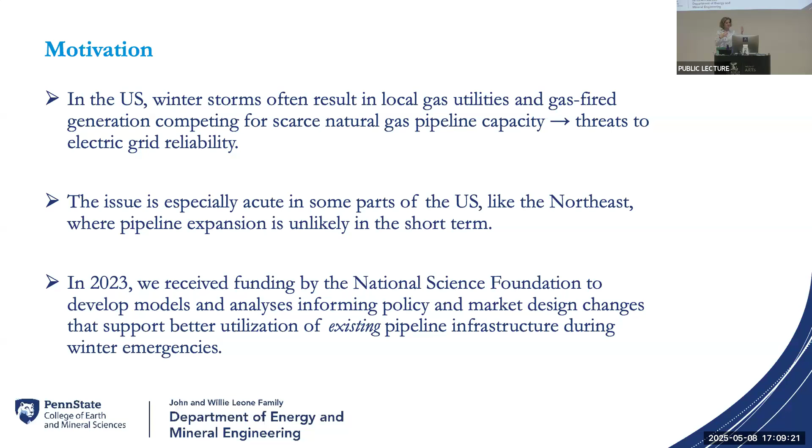And that is pretty much the objective of the project that was funded 2 years ago by the National Science Foundation. I do want to say that we're not taking any policy positions, or we're not making any recommendations on the fact that there's no need to expand capacity. That's a separate story. Sometimes I get questions on that, but that's not part of what we're studying. One of our assumptions, if you want, is that the pipeline capacity cannot be expanded in the near term. So with that motivation, here's going to be the outline of my talk.

I will give you a little bit of background on what's happening on the gas market and what types of contracts the power plants can sign, and again, what frictions there are right now that prevent them to get access to gas. Then I'll talk about a proposed initiative that we modeled to see if this proposed initiative could help enhance grid operations during a cold snap, during one of these emergencies. I'll give you an overview of the models.

I did share a paper with Franca and did I send it to Pierluigi or Franca? I don't remember. Maybe to Pierluigi, but I don't know if the paper was shared. But if you'd like to share it, I'd welcome any feedback that you may have, because this is still work in progress. We haven't published it yet, so any feedback is welcome.

But I won't go into the details of the model formulation. I will just give you a very high-level description of what the model is doing, and happy to talk about the details later. I'll show you a couple of findings, and then I'll conclude and I'll tell you what we're trying to do next, and hopefully get your feedback and hear your thoughts. I've been talking to a number of people over the past few days here in Australia, and learning about what you are doing to manage and allocate gas on your existing pipeline capacity. So I'd welcome additional discussion and feedback on that front.

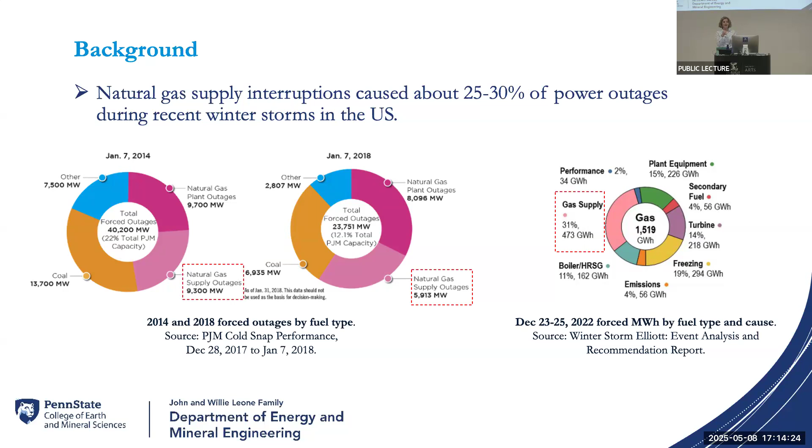There could be wellhead freezes, which were a significant problem, for example, under Winter Storm Uri. So this number by itself is not telling you exactly what the issue is. It's just telling you that there is a problem with natural gas supply. So then let's unpack that a little more. Why can't gas generators get gas?

So that's when we started looking a little more into the contracts. So in the US, and I think in Australia it's the same, gas-fired generators can arrange for gas sales and delivery using two types of contracts that go under the name of firm and interruptible. Firm contracts usually establish a higher order of priority for the fuel requested, and they guarantee gas delivery under most

circumstances. I want to emphasize the word most, because what in fact happens is that during some of these winter storms, the pipelines start calling OFOs, which are critical periods, and they don't even satisfy the firm contracts. So those are the firm contracts. The interruptible contracts are contracts that obviously cost less, lower cost service with reduced delivery priority and very high chance of being curtailed during periods of high demand.

Now, in 2023, about 80% of the gas-fired generators in the United States procured their gas with firm contracts, and the rest, about 20%, was procuring gas through interruptible contracts. But here's the catch. The number that I'm showing you at the top actually masks a lot of regional variation. And I'm showing you here a figure that was created by the Energy Information Administration. This is for 2016, but numbers haven't changed dramatically if you bring it up to 2023.

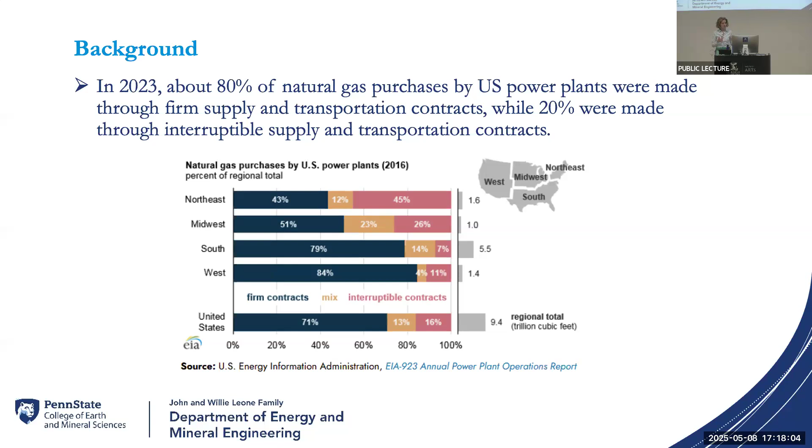So now the story becomes even more interesting when you learn that even gas generators with firm contracts can't get gas. This is counterintuitive, right? Because you would say, okay, wait a second. So these generators are paying for firm gas, but then they don't always get gas. Yes, that's exactly what happens.

And again, that's very counterintuitive, and even FERC says it, right? They say somewhat paradoxically. That's a problem right there. So obviously, that's when we started investigating what is happening as part of the NSF project. And unfortunately, you can't really find a place that gives you, even these reports are pretty opaque when it comes to the real reason why gas-fired generators with firm contracts lose gas.

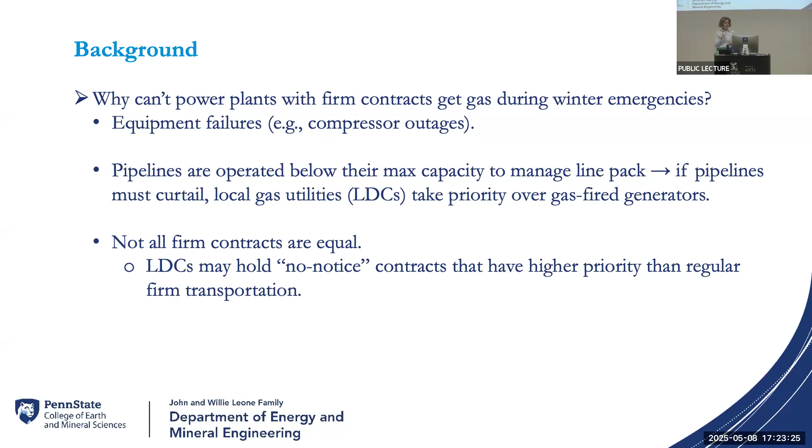One of the issues that gas generators have often raised is that the very first nomination cycle, the timely cycle, happens shortly after the clearing of the day-ahead electricity market. So the timely cycle is the most liquid gas cycle, and the day-ahead market is generally where most of the electricity gets scheduled ahead of the day in which power gets delivered.

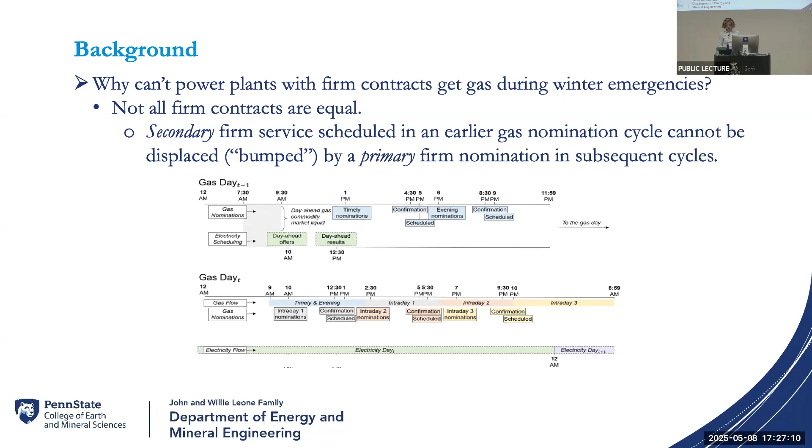So now, with all of that background in mind, here's the recommendation part and the policy part. So obviously, this is a big problem, and a number of forums and stakeholder groups have been thinking about what to do about these issues of gas-electric coordination.

I don't know if any of you is familiar with, has anybody heard of NAESB before? So NAESB is the North American Energy Standards Board. It's an industry forum for the development and promotion of standards in the electric and gas industry. And so in 2023, they came up with a report that is publicly available, and they issued a number of recommendations to try and help better coordinate the two systems during emergencies.

And in particular, their recommendation 6 talks about this idea of facilitating contractual agreements between end users. And the end users in question here are obviously, on the one hand, the power plants, on the other hand, industrial customers that may not need gas during a winter emergency to maintain their production process, and they may be able to perhaps switch off during that particular emergency. So that was the NAESB recommendation in July of 2023.

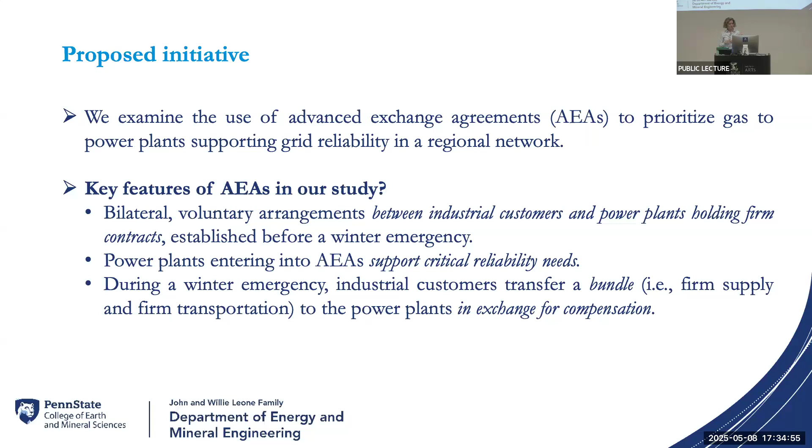So now, the goal here is to try and quantify the impact of this proposed initiative. And by that, I mean that we want to see how much that initiative can contribute to enhancing reliability in an actual grid. And the key thing we can measure is the reduction in unserved energy if we implement this particular type of contracts. And also another thing we can measure are the net benefits of the initiative. What do I mean by net benefits?

Well, if we implement these contracts, on the one hand, there's going to be a reduction in the costs of operating the system. And that's primarily because there is a reduction in unserved energy. So there's going to be a reduction in the costs of unserved energy. On the other hand, however, there's going to be a higher cost because there's a compensation that has to be given from the power plants to the industrial customers. So there's going to be a reduction in cost, but a higher cost on the other side. And the difference between these two terms is the net benefit that I'm referring to here.

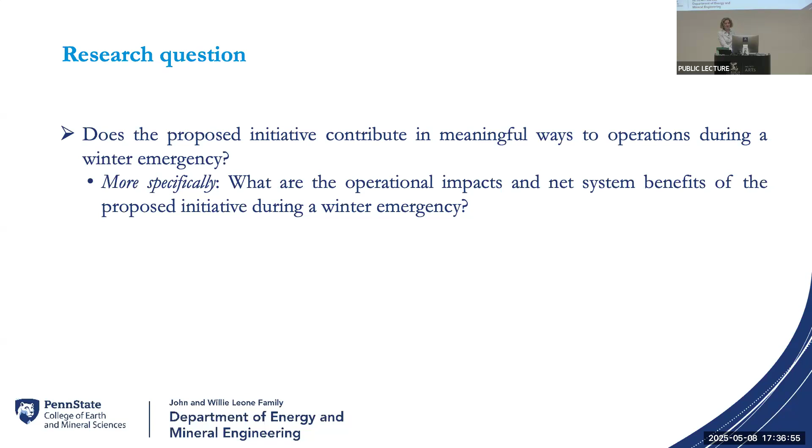So to answer the question of quantifying the impacts, we use optimization models. And specifically, like I said, I won't go into the details of the models, but these are models for the operations of a gas electric network. The objective of the model is to minimize the cost of serving electricity demand in the network. And this is subject to constraints that govern electricity flows, constraints that govern gas flows, and constraints that establish the order of priority in which gas customers would be curtailed during a winter emergency.

That's one of the main differences between the model that we developed and the previous models that were kind of oblivious, or they didn't consider contract types, and they didn't consider the order of priority in which these different gas customers would be curtailed during an emergency.

The second point is something, again, that I want to emphasize. We're not considering instances of pipeline failures. We're not considering instances in which there are compressor outages. And we're also not considering problems on the supply side, on the production side. We are aware that those are real problems. They were problems that happened, and we're not trying to discount them,

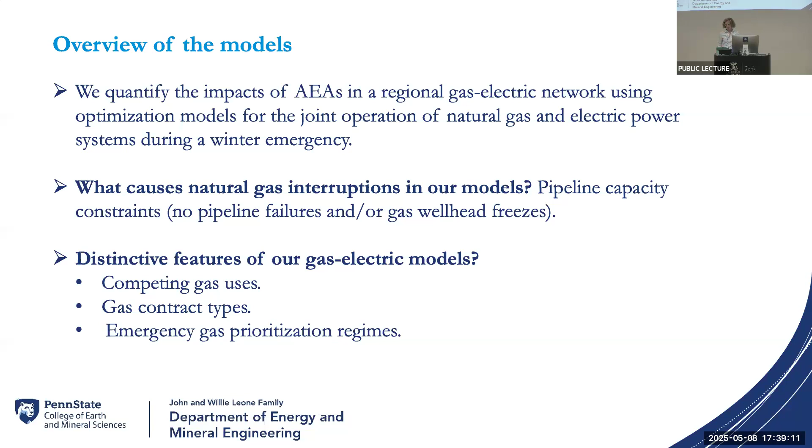So what are these two models? The baseline model I just described. So I just want to give you the order of priority that gets implemented in the baseline. The baseline is supposed to mimic, obviously in a simplified modeling setting, what is happening today in terms of prioritization. If the pipeline operator has to curtail, priority is given to the residential and commercial customers.

So the local gas utilities that serve those customers are never curtailed in our model. They always get 100% of their gas. The next ones that have priority are the customers with firm contracts for the reasons that I explained.

And so you can see that the two, I don't know if I have a clicker or if there's any way in which I can point to, well, I guess you can see them though, that the two boxes that are in kind of a rectangular shape, those are the ones with firm contracts.

The only difference between the orange and the green is that in one case, those customers, thank you very much. Yeah, so these two are the ones that, but I shouldn't move. These two are the ones that I'm referring to.

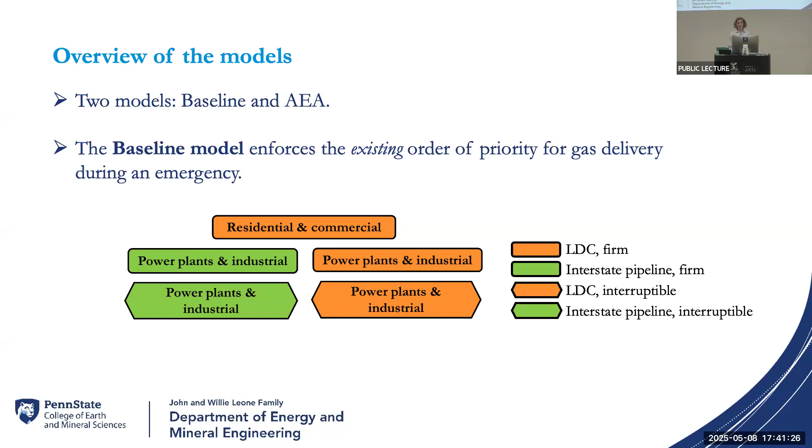And lastly, the two boxes here represent the customers that have interruptible contracts, and those have the least priority. So that's the existing situation.

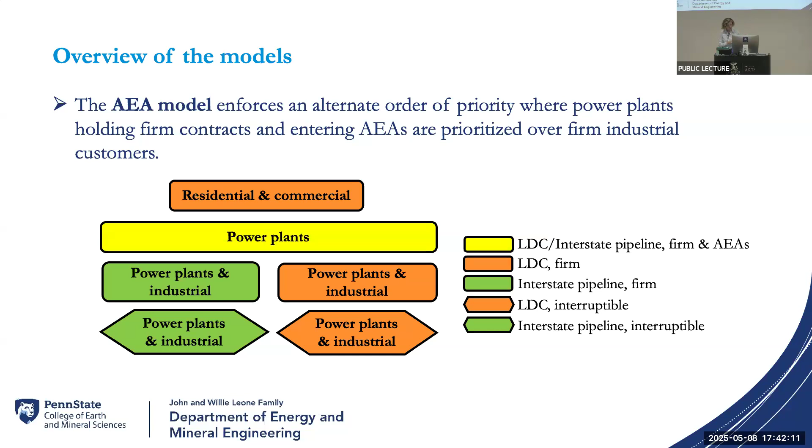In the AEA model, which is the model that implements our proposed initiative that combines the NAESB and the RTO position paper initiative, what you can see is that there is one additional box here, the one in yellow, and that refers to those power plants that enter into these AEAs, right? They get higher priority and they receive their gas right after the LDCs. And so they would out-prioritize other firm customers, and obviously they would also go before the interruptible customers.

So our test system is this one that I'm presenting here, a test system that covers 8 states in the northeastern United States. These states are part of 4 gas pricing zones that you can see here. The ones that you may have heard of are this one, which is Transco Zone 6, and then this one right here, which is the New England region. That's the Algonquin hub region.

These are incredibly constrained regions, while on the other hand, these are less constrained, and, for example, the green region, which is Leidy, is where a lot of the natural gas production in Pennsylvania is taking place. So those are generally less congested, and they have more production and lower prices.

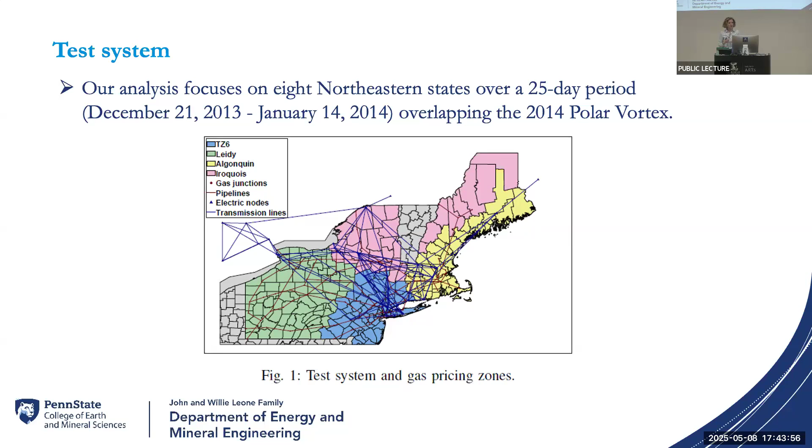The period that we're looking at is the 2014 polar vortex. And obviously the polar vortex lasted for a few days, but we are looking at a period of 25 days because we want to have a few days before and some days after of normal operations. And so overall, we have a total of 25 days, a period that encompasses the polar vortex.

If I have a power plant, say, sitting here, I don't need that to have a bilateral contract because it's not going to help with reducing unserved electric energy if needed.

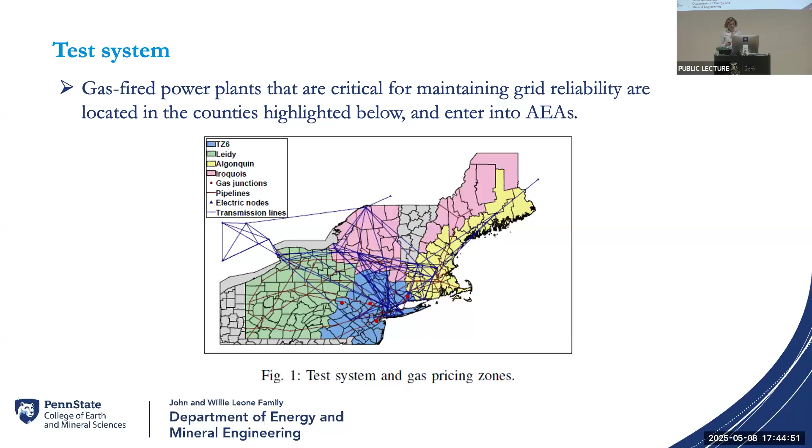So we present 2 sets of results in the paper, and in the interest of time, I'm just going to focus on the second set of results, and I'm going to show you just a couple of highlights. In the second set of results, we are considering contracts that are established between power plants and industrial customers that are in close proximity.

And by close proximity, I mean that they're literally sitting at the same gas junction, or they're sitting at adjacent gas junctions, and there is available pipeline capacity between the 2 junctions. And this is a more realistic scenario, if you wish, relative to the one that we considered in 1, which was supposed to be an upper bound to the amount that could be potentially reallocated.

But again, in a situation of emergency, you could probably have these contracts; this reallocation could only happen at the same location or in close proximity. The other thing that we did in this case is we assumed, and I think this one is too strong of an assumption, we might need to relax it.

We assumed that only industrial customers that have dual fuel capability would enter into these AEAs. The idea being that if an industrial customer has another way of, say, maintaining their production process using an alternate fuel, they might be more willing and able to enter into the contract.

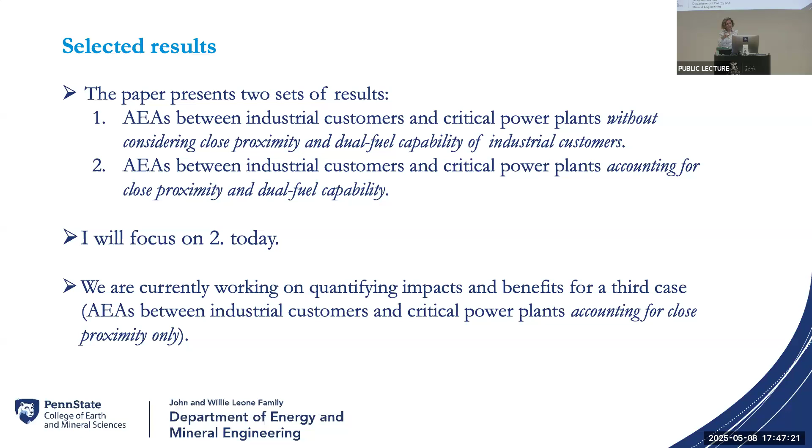And that's the reason why we're currently working on a third set of results in which we only look at close proximity, but we'll disregard the assumption of dual fuel capability. So do I have time to, okay, yeah.

At the end, let me just show you one thing, which are the net benefits here. The days that you see plotted on the x-axis are the days in which there is unserved energy during this 25-day period. And these are the days in which the contracts would be triggered, right? Because that's when the reallocation would happen.

Like I was saying, the net benefits would have two components. There's going to be a reduction in system costs because there's less unserved energy. But on the other hand, there's going to be a compensation to the industrial customers of their value of lost load. The difference between these two is going to be the net benefit for that particular day.

So what's the magnitude of the net benefits, which was the question I asked at the beginning? At the height of the crisis, which is on January 7th, the net benefits of this proposed initiative are about 12% of the baseline system costs, which are the costs of serving electricity demand in the baseline model. In the baseline, we didn't have any contracts implemented.

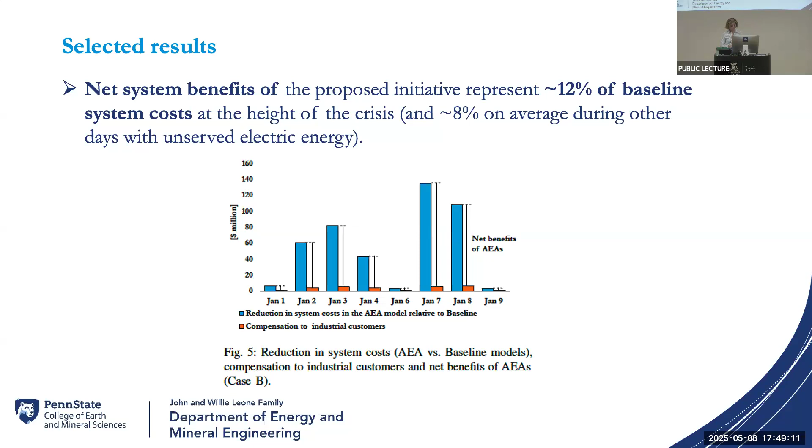If you exclude January 7 and you just take an average of the net benefits in the other days, you're roughly between 7 and 8% of the costs in the baseline. So now we've quantified the impact of this proposed initiative.

And the conclusion is that this proposed initiative could help, but obviously it's not solving even most of the problem, right? It's solving only 10% of the problem, and the problem would be unserved electric energy during these instances. Obviously, there's going to be a need for additional and stronger, broader regulatory reforms.

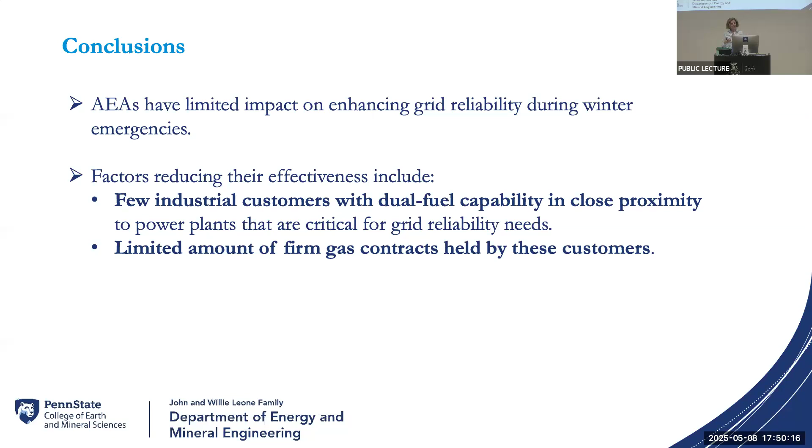And we need to also understand if the constraint is on the number of firm contracts that are signed on the power plant side, or maybe there's just too few contracts on the industrial side at the locations that truly matter. So that is something that, again, it's a spatial analysis of results that we are doing right now.

And with that, maybe I will just pause and leave some time, like 15 minutes, for Q&A. These are some of the additional directions we're thinking about, but I'd be happy to take your comments and questions.

I mean, here? No. Okay, we'll start with some questions in the room first. Okay, thank you again. And yeah, please, I welcome questions. Is it one gentleman over there, please?

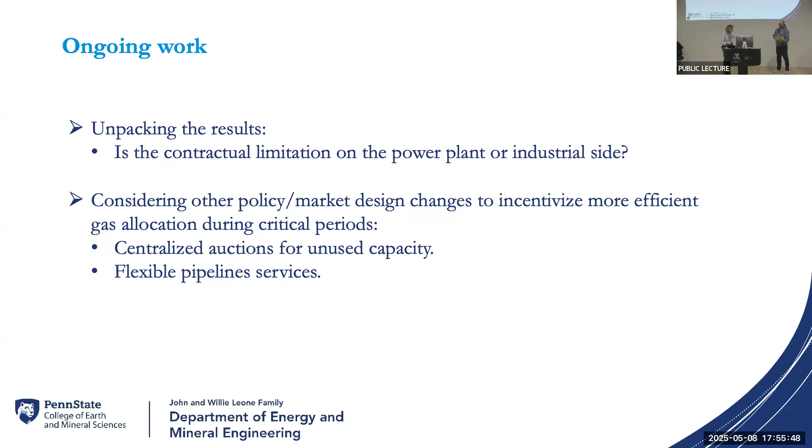Maybe we can take a question from the online audience. For the option of auctioning the unused gas, has it actually been done in industry, and how can we implement this? And eventually, do you need to extend the infrastructure, or will it just stay with the current infrastructure? So, just to make sure I understand, there are multiple questions. The first one would be, has the auction of unused gas capacity already been implemented in some way?

So yes, the auction for unused gas capacity is implemented here in Australia. If there is any unused capacity on any day, that capacity gets auctioned and can be procured through an auction. This mechanism works during regular days to reallocate capacity, but to my understanding, it has not worked during critical periods, because during critical periods there's very little unused capacity to begin with. So it hasn't been used in Australia for the purpose we're considering.

In the United States, there is something not exactly the same, called the capacity release market, which doesn't work as an auction, but was designed for buyers and sellers to share excess capacity. And what we see in the US is that the capacity release market does not work during these critical periods. There's no release of capacity then, which makes me wonder whether the auction mechanism for unused capacity could be truly effective when there's no capacity.